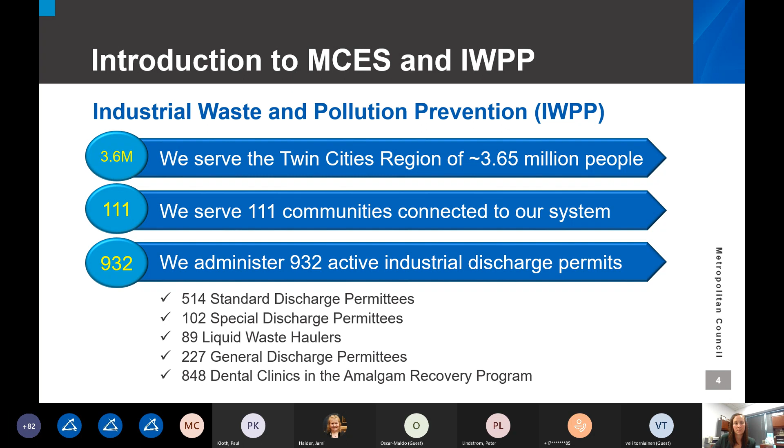Our authority comes from the Clean Water Act of 1972. The act called upon EPA to develop the National Pretreatment Program, as well as pretreatment standards to control industrial discharges into sanitary sewer systems. This program delegates the enforcement of those pretreatment standards down to local programs like MCES. It also allows us to develop our own local limits to protect our plants. We have had an approved pretreatment program since 1982.

In our pretreatment program, we issue permits to our industrial users. Most of you in attendance hold either a standard, a special, or a general discharge permit. There are some differences between them. This table aims to summarize both the commonalities and the differences, most notably in the permit duration, reporting frequency, and sampling requirements.

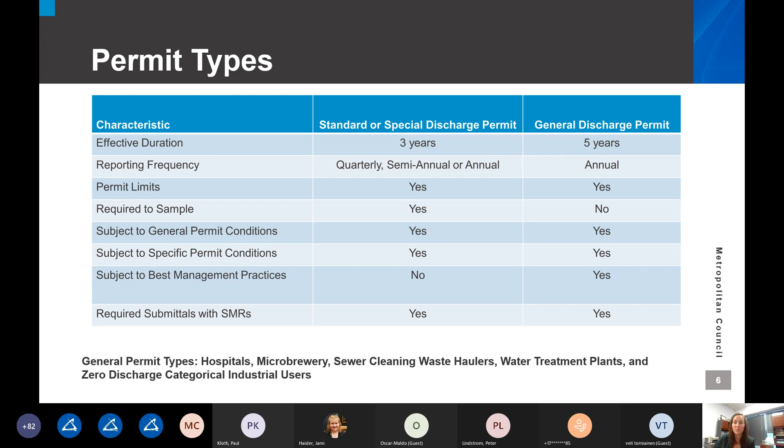Over the past 10 years, we have moved certain industry types to general permits because they have less of an impact on our system, and their discharge can be managed easily by following best management practices. We currently issue general permits for hospitals, microbreweries, sewer cleaning waste haulers, water treatment plants, and categorical industrial users that do not discharge any processed wastewater to us.

One big change this year is that we will be implementing a new low-impact standard discharge permit. This permit is intended to lower the regulatory burden for standard discharge permit holders who are not classified as a significant or categorical industrial user and are not expected to have a significant impact on our collection system and wastewater treatment plants. This new permit type will be effective for 5 years.

The reporting frequency will be annual, and sampling will be required only during the first year of the 5-year permit cycle. If you qualify and your wastewater is strength chargeable, you will be assessed strength charge for the duration of the permit based on that first year of analytical results.

This permit type will carry a lower fee. It will be $825 in 2022. Finally, MCES will continue to inspect and monitor these facilities at least once during the permit cycle.

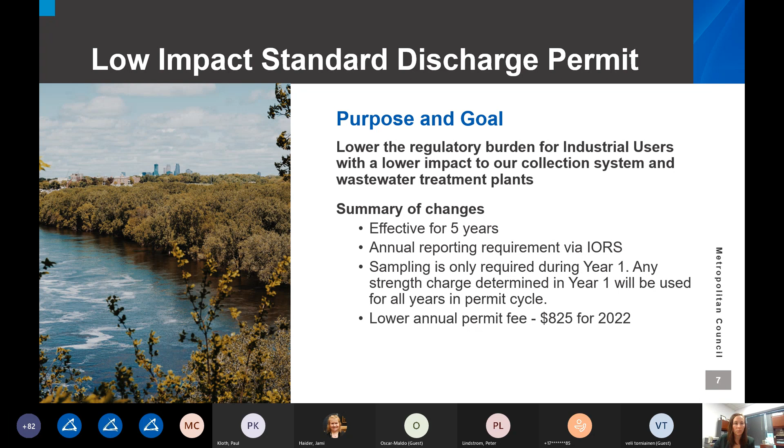There are some eligibility criteria for the new low-impact standard permit. First, the industrial user must not be classified as an SIU or a CIU. The average total facility discharge volume must be less than 25,000 gallons per day, and the average strength charge must be less than $1,000 per year.

The concentrations of all metals must be less than 25% of the corresponding local limit, and pH must not be a concern. The industrial user also cannot rely on a significant pretreatment system prior to discharging to MCES. And finally, an industry must have a strong history of compliance.

So we will be rolling out this new permit type this spring in the next couple months. We are using data from the last 3 years to see who is eligible. So next year, those who are eligible will be notified and will be invoiced a lower annual permit fee.

After that, our permit staff will be working on amending and reissuing those permits. Once they are reissued, your reporting requirements in the online reporting system will be updated.

So those who qualify and are currently on a semi-annual reporting status, you will not be required to submit your January-June 2022 self-monitoring report. And if you already have done your monitoring for the year, you will be able to submit that with your annual report that will be due in January.

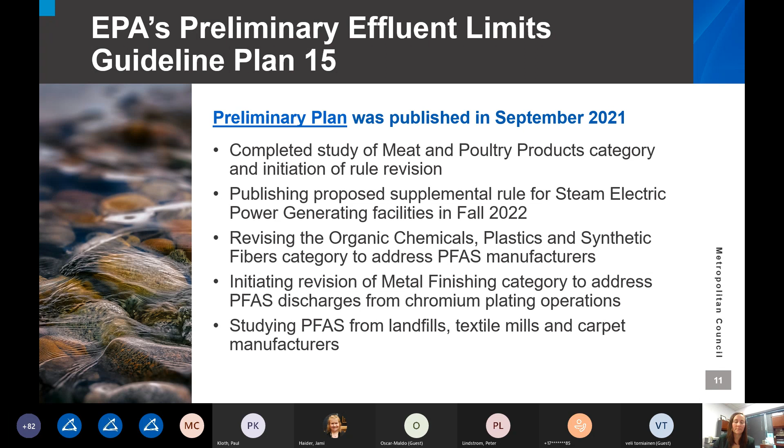This revision will affect some of our industrial users. And lastly, they are beginning to study PFAS from landfills, textile mills, and carpet manufacturers. This is in the study phase, not in initiating a rule or limits phase. So they're just studying at this point.

When we take a look at the state landscape, many of you are likely aware that MPCA issued its PFAS monitoring plan last month. The plan has 3 goals and objectives. The first is to gather data to help craft policies around PFAS and incorporate them into existing programs. They want to identify areas of concern that need quick action.

They're also looking to use data to support source reduction and pollution prevention activities. MCES was notified that 5 of our 9 wastewater treatment plants will be included in the wastewater monitoring plan. Those plants are Rogers, East Bethel, Seneca, Blue Lake, and Hastings. Our largest plant, Metropolitan in St. Paul, will be subject to the air monitoring plan.

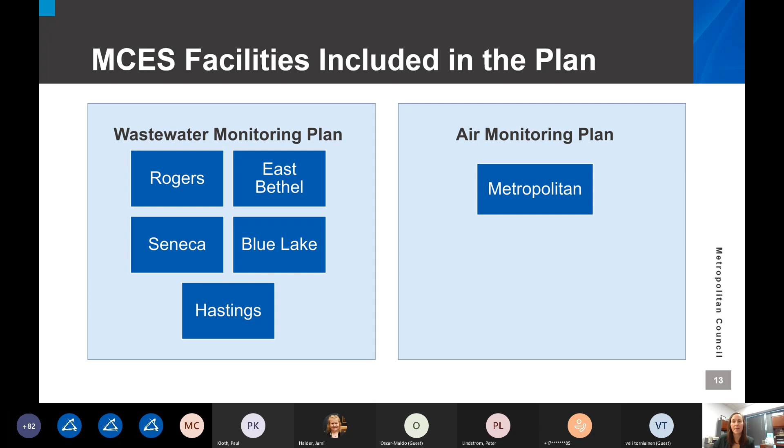Of our 4 remaining plants, which are Metropolitan, Empire, Eagles Point, and St. Croix Valley, they will not be covered by the wastewater monitoring plan. Those 4 plants all discharge effluent into a water body that MPCA has listed or has proposed to list as an impaired body for PFOS. These facilities will go through a permit-based NPDES process to address PFAS.

There was a kickoff meeting yesterday with MPCA and they shared their timeline. Facilities subject to the wastewater monitoring plan will conduct influent sampling in quarters 1 and 2 of 2023. In the following 6 months, facilities will then be conducting source identification and reduction work, hoping to reduce those sources. Then in quarters 1 and 2 of 2024, 2 more samples will be taken to determine the effectiveness of that source reduction work.

MPCA will be using those first 2 quarters of influent sampling data to determine which municipal wastewater treatment plants are in the high, medium, and low priority response threshold groups. Future source reduction activities will then be determined for each group.

It is anticipated that there will be future phases of the monitoring plan that will expand to sampling for PFAS in our effluent and our biosolids. They also plan to develop guidance materials to help municipal wastewater treatment plants look for PFAS sources and reduce them in their influent.

At this time, we are still developing our response to the monitoring plan. There are 91 wastewater treatment plants subject to the plan, so it will be very important that we all use the same methods for sample collection and analysis, as the data will be used by MPCA to develop future phases of the monitoring plan.

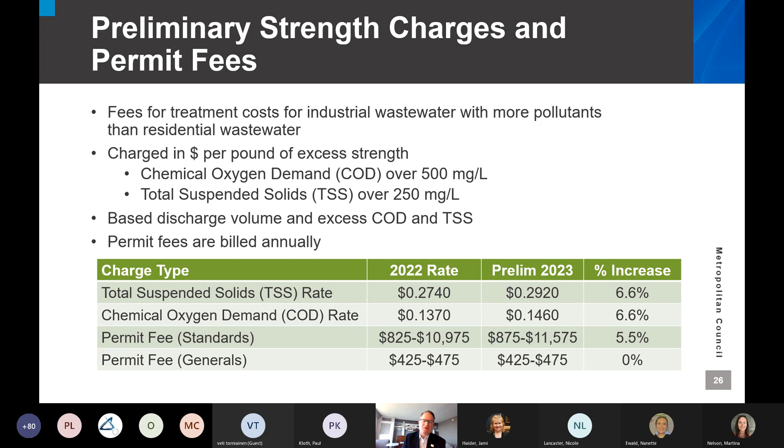And then our permit fee for our generals will stay the same. That's because we've found that the marketing and printing costs to increase it is actually more than the revenue gain that we would have if we raised the price. So we'll keep those there. Service availability charge, that's our connection fee. It pays for the capacity in the system if you either connect first or if you expand your use. We do charge that directly to local governments for initial connections, and then those governments pass it on to the end users, which is you folks.

It's based on the discharge of a typical household, which is 274 gallons a day, or the maximum discharge from a house. And then, of course, a business will go through our SAC determination letter process to determine how many SAC units are due. And we use SAC as a tool. We call it generational equity. If we build a pipe, we build it bigger than we need it, but we put it on financing so that future users will pay for it rather than current users. And that's what's baked into the SAC charge.

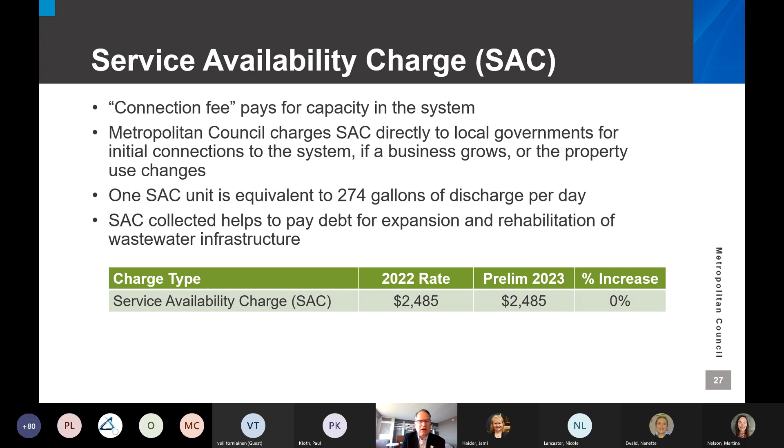We are thrilled to announce, though, that it'll stay flat, $2,485. We haven't raised that since January of 2014. And we've seen great development in the region, and so that is keeping our SAC healthy. An alternative to SAC is the industrial capacity charge. This is a choice you can make when you first get your industrial SAC bill. So we charge for commercial SAC, which is the SAC for the building, and then industrial SAC, which is the SAC for the process discharge.

And you can choose to either buy all your units up front, or you can buy a minimum of 3 and then kind of pay as you go. It's like a rent, and it is not rent to own. It is just rent, much like an apartment. And that's going to go up just a bit. That's driven by a lot of factors, including our expenses, but also the flows that we see. And you can see it's just up 1.8%, and that is $2.25 per 1,000 gallons. So it's based on flow. We use that as a proxy for the capacity that's demanded. And that is all I have. And so with that, I will be happy to answer any questions.

Great, thanks, Ned. So I'm going to pause and look for some hands, see if I see any questions in the chat. Ned, I did get a question. What were the impacts of COVID on MCES finances the past 2 years? There are 2 answers. The short answer is none. But the longer answer is a little bit. Well, let's even back up. So in 2020, we built our 2021 budget in March of 2020. So that's when everything started, all of the shutdowns. And there were dire predictions that cities would go bankrupt because commerce would shut down. And so we wanted to be sensitive to that.

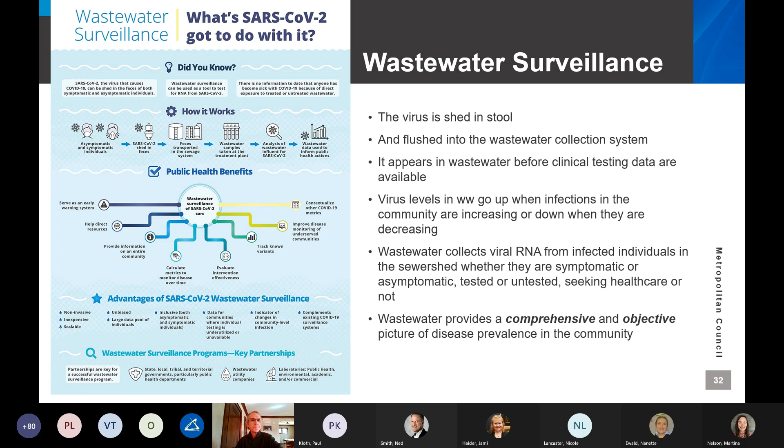So what we're doing is at the Metro plant, we collect a daily 24-hour composite sample of our influent. We homogenize that sample. We treat the wastewater with a little bit of what's called Zymo DNA/RNA Shield. It's a stabilization and lysis buffer that basically breaks up the virus particles that may be in the wastewater, and it stabilizes the RNA that we're looking for. Mix that well and incubate it for about 90 minutes, and then we extract the viral RNA from that sample.

To do that, we use what's called a Zymo III-P column, and we run the sample along with some 100% ethanol through the III-P column. This is a silica column, so when the RNA in our sample gets into the column, it attaches to the silica in the column, and it sticks basically and stays there, and the rest of the junk flows through. And then we wash the residual junk off the column, and we elute the RNA in 200 microliters of elution buffer.

And then we take that 200 microliters and we run that through a second, smaller column, which is also a silica column, and basically do the same thing again, but it's a smaller column, so we can elute it with a smaller volume of water, just 20 microliters in this case. So what we've done is we've basically gone from our original sample, which was 3 milliliters of wastewater, down to having all of the viral RNA in just a tiny little teardrop sample of 20 microliters of pure water.

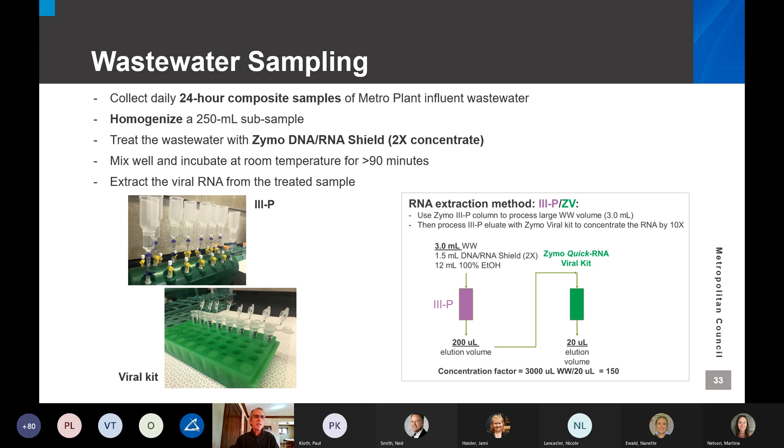And what we do with that is we take it over to the University of Minnesota Genomics Center, and they do something called droplet digital PCR. And what that is, we're looking for specific fragments of the viral RNA that is in our sample. And these fragments that we're looking for, in this case, we look for the N1 and the N2 fragments on the nucleocapsid gene. And so that will give us basically the total amount of viral RNA in our sample.

And then we're also running targeted mutation assays looking for the K417N, L452R, and the HV69/70 deletion or mutations, and those tell us what variants are actually in our sample. So we can distinguish between the different variants of concern that are circulating in the community by looking at the wastewater and measuring these specific mutations.

And then we get the data back from the Genomics Center within 48 hours, and we report it to the Department of Health the next day, basically. And we also report it to the governor's office. And we sit on a bi-weekly meeting with the Minnesota Department of Health. They have an early warning system team where we talk about our data and try to help them determine if there's going to be an increase coming or what the variants are doing in terms of changes.

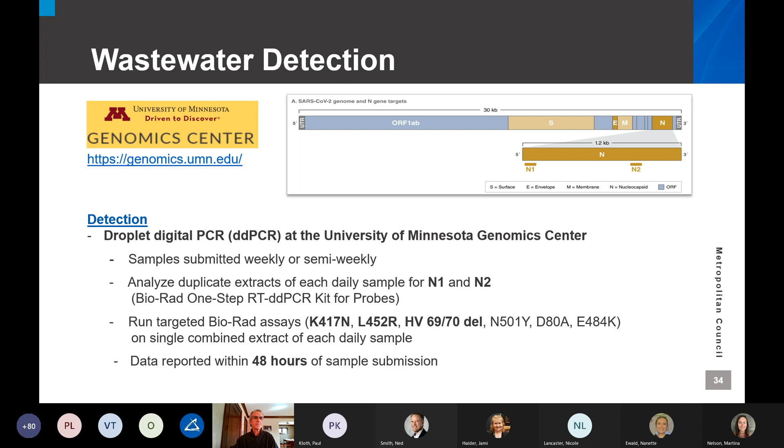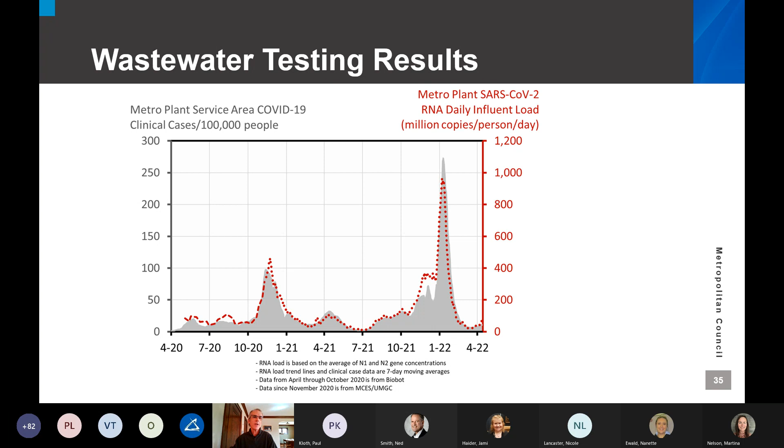And so I encourage you to have a look at our dashboard. Again, it's updated every week on a Friday around noon, and you can see what's going on in your community right there.

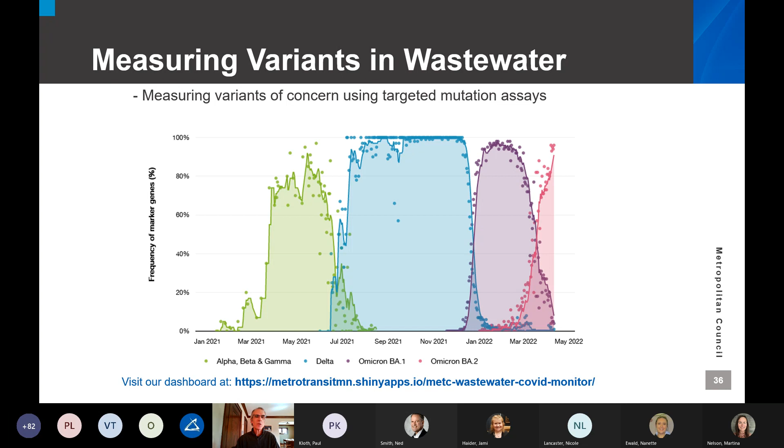So in summary, we can accurately measure the SARS-CoV-2 RNA concentrations in the wastewater entering our treatment plants. The RNA concentrations and loads track very well with the clinical COVID-19 case counts reported by the Department of Health over time. This data is useful to the public health authorities, and they're especially interested in the variant information, and it's really good now that there isn't as much clinical testing going on, because they're kind of flying blind in terms of having enough data to make decisions. So the wastewater signal is really important for understanding what's happening when case numbers are low.

And we can monitor the variants of the virus that are circulating in the community and hopefully provide early warning of their presence and prevalence to the decision makers at the Department of Health and in the governor's office.

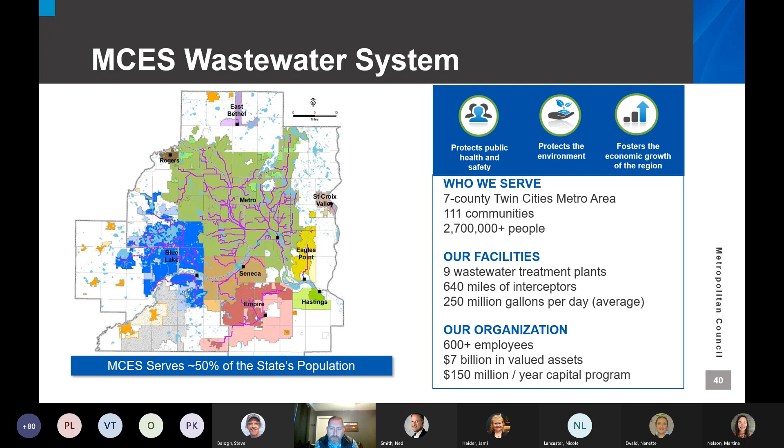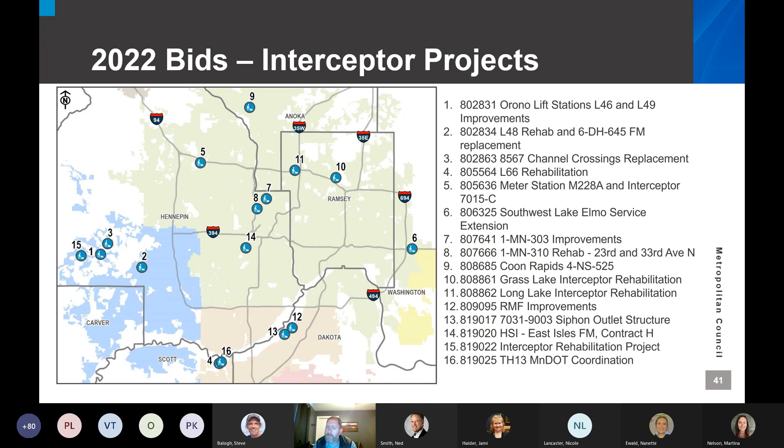The 9 plants combined treat approximately 250 million gallons of wastewater each day. 8 of the 9 treatment plants discharge their resulting clean water to the Mississippi River or St. Croix River, and the East Bethel facility disposes of its highly treated discharge through rapid infiltration basins, which augment the shallow groundwater table.

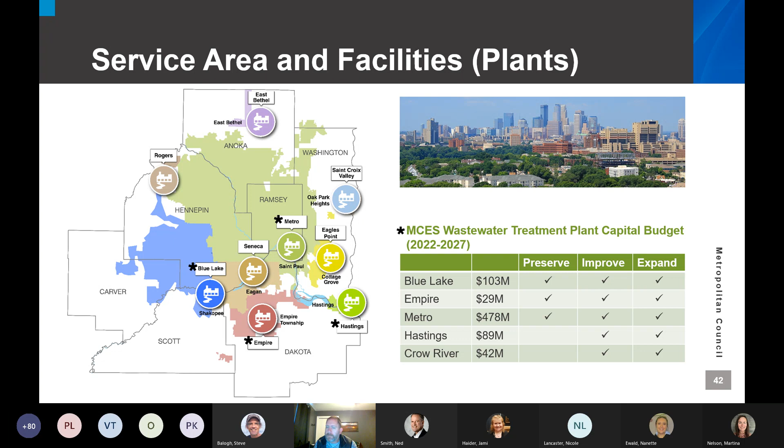When we develop our capital program, finance and wastewater planning and capital project delivery teams work together to balance our identified needs with the impact to our rates. We look at our history of spending, inflation, and the timing of our large projects. Our goal typically is to spend between 80 to 85% of our planned program, which gives us some flexibility if a project's priority changes due to needs from one of the infrastructure partners, or if a project slips a bit on schedule.

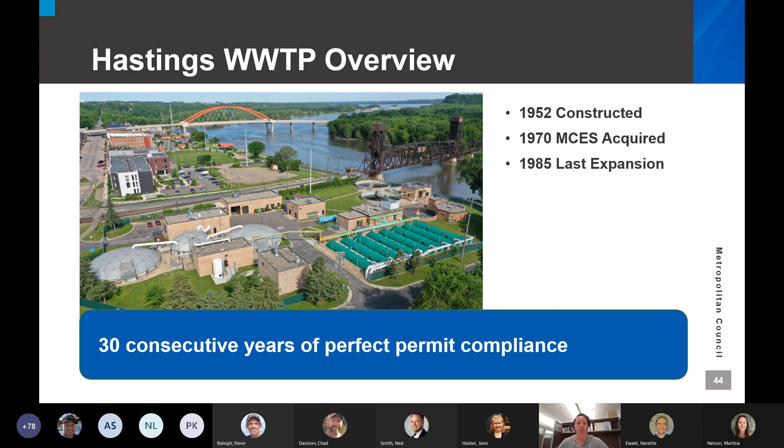Relocation of the Hastings wastewater treatment plant is really driven by 3 main elements. The first element is growth. The Hastings treatment plant is projected to exceed its existing capacity of 2.34 MGD in 2050 due to growth that's occurring within the service area.

The second element is the ability to meet future potential regulatory requirements. In addition to capacity needed for growth, additional treatment capacity would be required to meet future environmental regulations for total nitrogen, which we anticipate to see come to us within this planning period.

The third element is really the need to make significant investments in the existing facility. That condition assessment that I mentioned indicates that we have a need for significant investment in a site that can no longer meet the needs of our long-term service area.

So in lieu of continuing investment in that site, what we will do is relocate the facility and perform a very modest renewal project at the existing site in order to continue reliable service through commissioning of our new plant. So just enough work to get us through the construction and relocation of our facility.

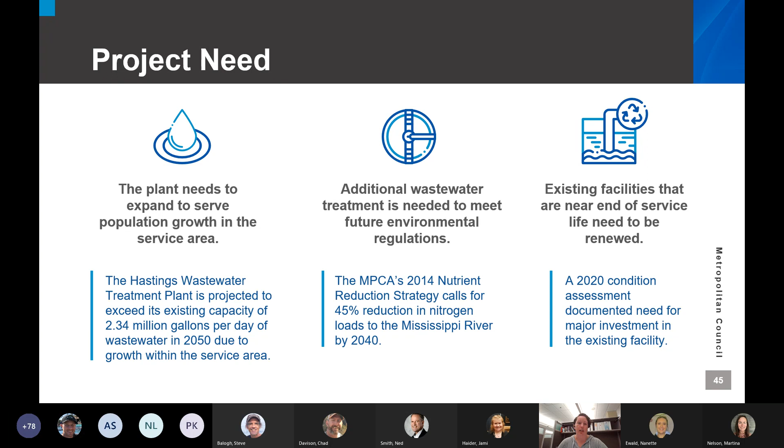The new wastewater treatment plant will be relocated about 2 miles southeast of the existing plant site onto 221 acres of MCES owned property located in Hastings and Ravenna Township. The overall program cost for relocation of the plant is $165 million. There are 3 main work areas required to relocate the facility.

First is a new lift station, force main, and gravity sewer needed to transport wastewater to the new plant site. That work is slated to be delivered via design bid build, occurring 2024 through 2026. That work would then commission just prior to startup of the new wastewater treatment plant. The estimated cost of that portion of the work is $23 million.

The second element is a new wastewater treatment plant and an outfall to the Mississippi River. That work will be delivered via the design build process, anticipated to occur 2024 through 2026. The design build process requires the design builder to certify plant process performance, keeping responsibility for performance with them until the council accepts it. So we would expect at least 1 year of commissioning and process proving by that design build team to begin in 2027. The estimated cost of that work is about $139 million.

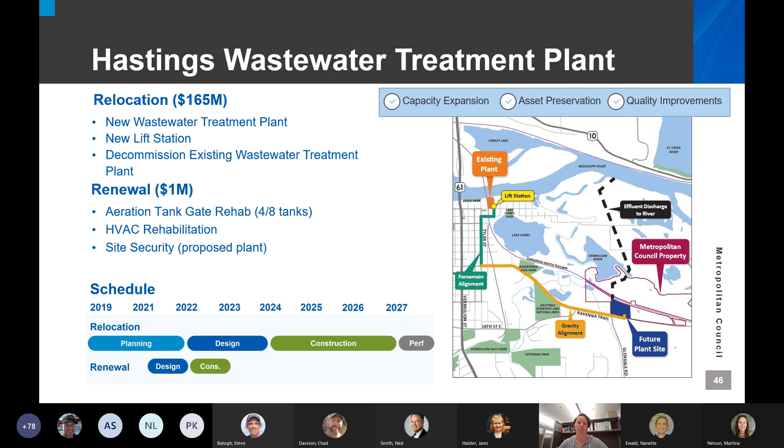There is a modest renewal project underway at the current treatment plant, just to maintain reliable operations until the new plant is commissioned. That work includes rehabilitation of some aeration tanks, mechanical HVAC work, and site security improvements, anticipated to start this summer.

The facility would be located in the city of Hastings with no treatment plant infrastructure constructed in Ravenna Township. This area is able to support a 10 MGD facility. It minimizes disruption to the natural landscape and is the most efficient and effective use of the site. Further elevating our treatment structures will allow us to protect our infrastructure from the 500-year flood, and it also allows the treated effluent to flow by gravity to the Mississippi River.

Wastewater will be treated using a variety of physical and biological treatment processes. Effluent will be disinfected by a UV system prior to discharge to the Mississippi. A life cycle cost analysis determined that continued transport of solids to the Metropolitan Wastewater Treatment Plant for incineration is our most cost-effective solids management alternative. A 2-lane drive-through loadout facility would be provided to support increased efficiency of this practice.

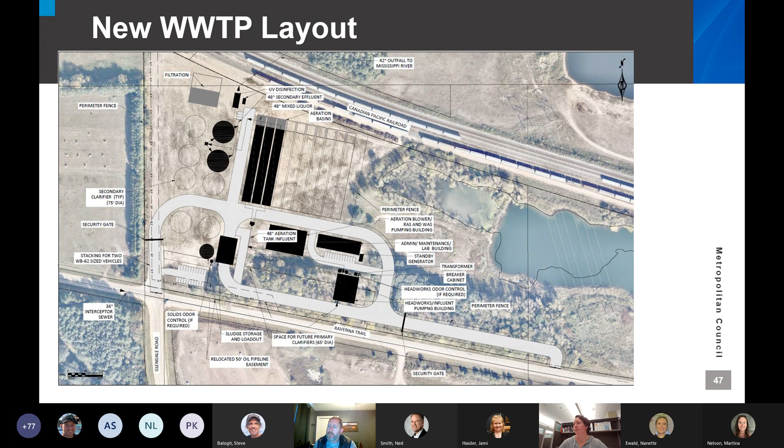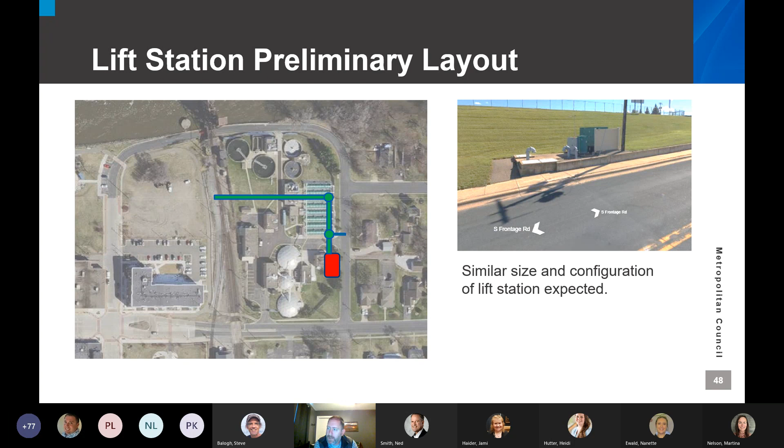The existing system in Hastings has a large trunk pipe that comes down, basically following the railroad tracks on the east side of town, just east of Tyler Street. As it crosses 10th Street, that sewer is at an elevation where we can divert 90% of the total Hastings wastewater system flow straight to the new treatment plant by gravity sewer.

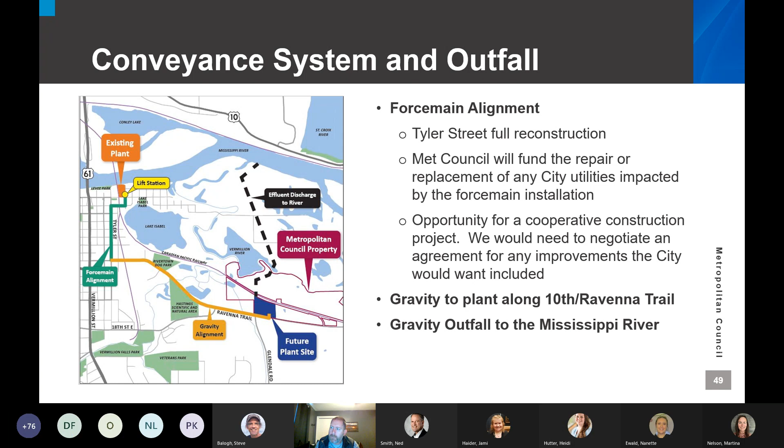Met Council took ownership of the existing plant in 1970. We entered into an agreement with the city at the time that stated if the property ever ceased being a wastewater treatment plant, the land would be reverted back to the city. So we have to have some sort of agreement to facilitate handing that property back over to them so they know exactly what they're getting.

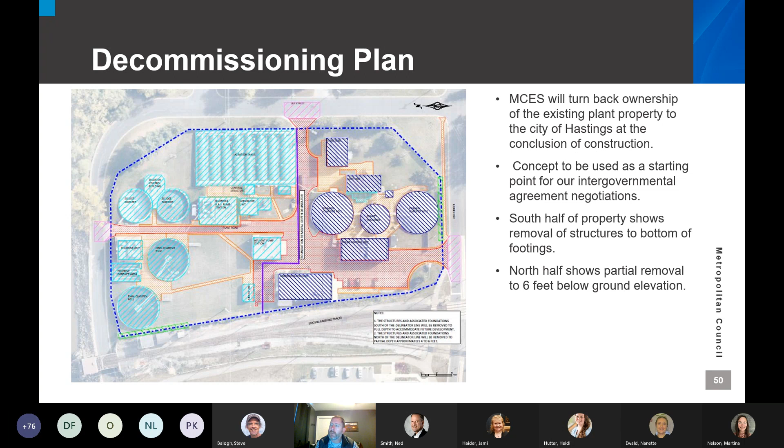That concludes our presentation for Hastings. We welcome any questions.

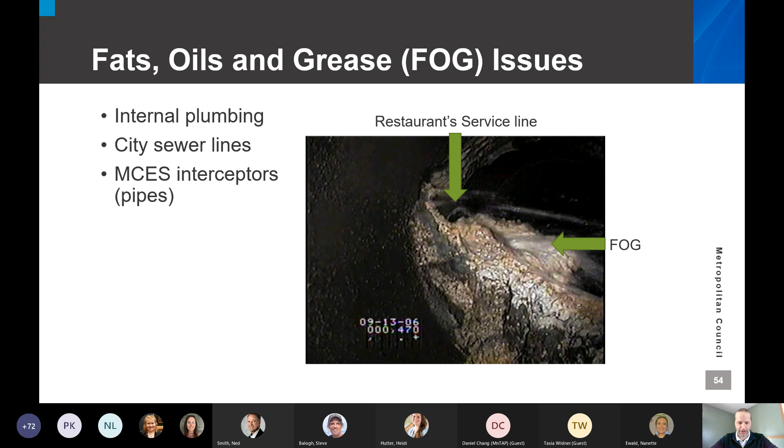FOG that reaches the primary treatment plants or tanks of our smaller plants will float on the surface and needs to be skimmed off, then hauled to our largest treatment plant, the Metro plant in St. Paul. All of this FOG removal creates labor, disposal, and transportation costs.

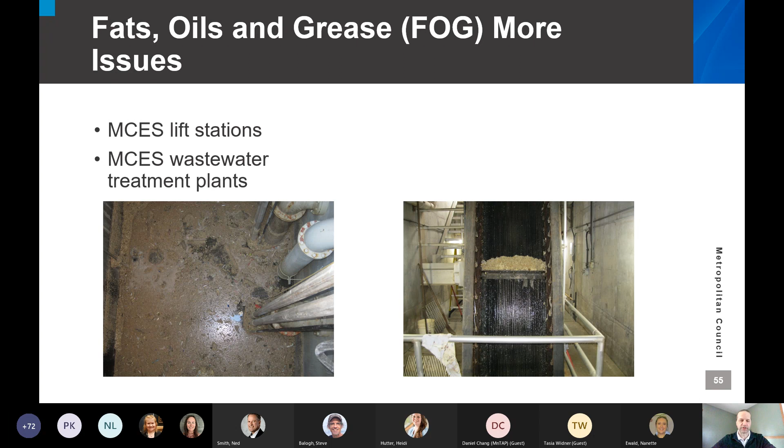So what can be done about this problem? If your facility has a grease trap or interceptor, it needs to be maintained properly. The frequency of maintenance will depend obviously on the nature of your flow and the size of the interceptor, but certainly often enough to ensure the efficient operation of that interceptor.

Source control is also important. This will vary by facility and may require some creativity and employee training, but any steps that can be taken to keep grease out of the drains to begin with, for example, placing grease-laden waste in either trash or recycling receptacles instead of just blasting it with scalding hot water and sending it down the drain will help us a lot.

Lest anyone feel left out of this discussion, even individuals can do their part in the home to keep grease out of the sewer. This can be done by placing greasy food waste in the garbage and never pouring any type of liquid grease down the drain.

I thank you for your time, and I will now turn it over to Isaac Razor, who will talk about the problem of rags in the sewer.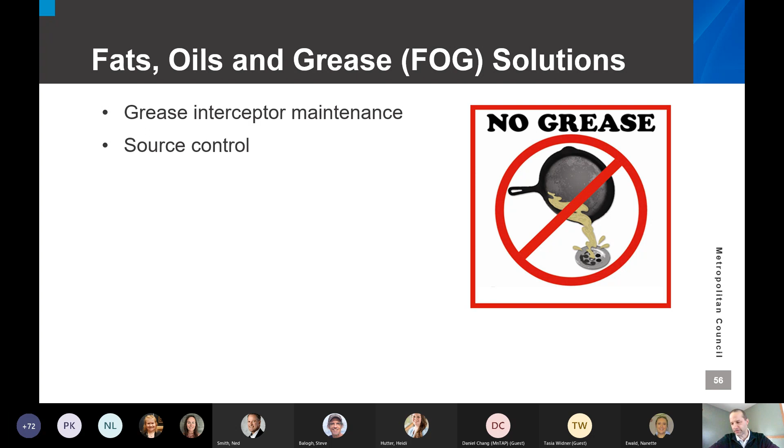Hello, everyone. My name's Isaac Raser. I'm an assistant manager in interceptor operations at the MCES. The interceptor department is the department that operates and maintains our collection system.

Before I get started, hoping everyone can kind of see the blinds in my office behind me. The sun is shining today. I had to close my blinds before this presentation, so please get outside and enjoy some sunshine. We have not seen much of it lately. All right, back to business.

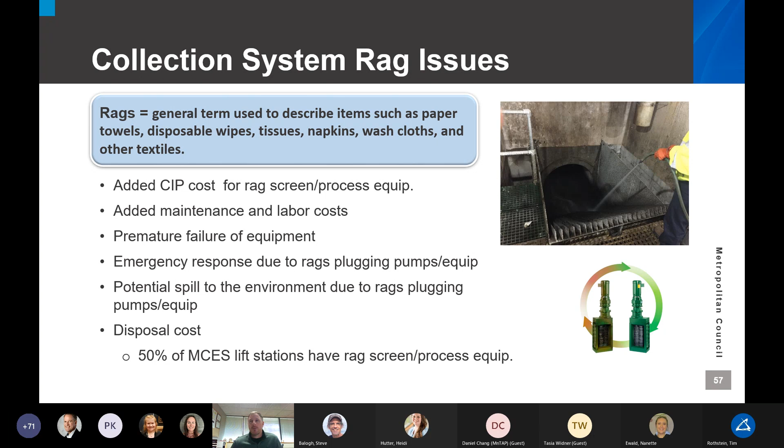I tried to move to the next slide and I don't know if it went. Still seeing your first slide. How about now? Now I see it.

All right, thank you. Just a couple examples to share with everyone about some issues that we find in the collection system. These photographs are not pulled from the internet. These are from actual MCES crews dealing with rags in our collection system. I have a whole folder full of them. I tried to pick out a few good ones here.

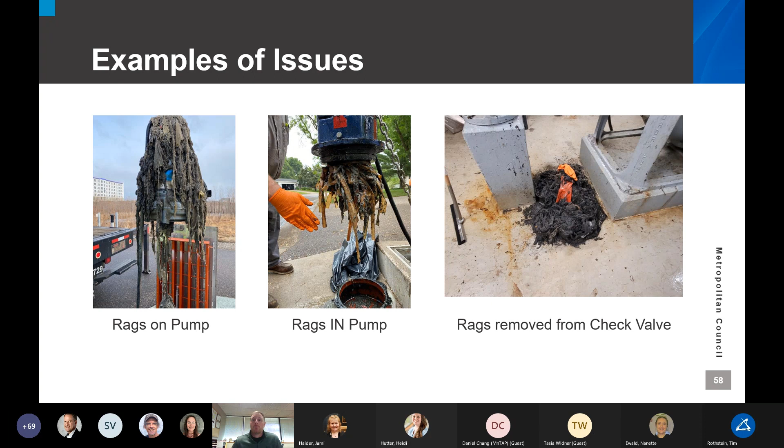We have worked with our communications department on coming up with some ways to do that. A lot of times we'll send out flyers, mail things out, or just stop in and have conversations with businesses. With that, I think that is my last slide.

Great. Hello, everyone. I'm Brian Davis, and I work in water supply planning here at the Metropolitan Council. I'm going to be talking with you today about the regional benefits of our water efficiency grants and the legacy amendment funds that we receive.

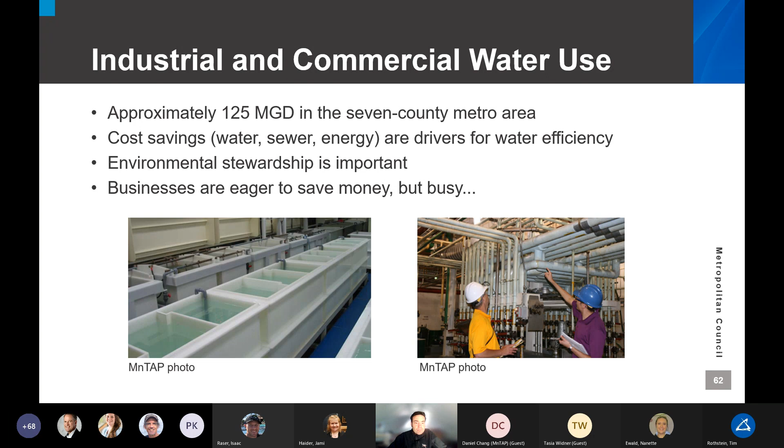They don't have enough staff or enough staff time to focus on some of these projects where the water savings can be realized, which is understandable. So to address that, MCES has been working with the Minnesota Technical Assistance Program, or MnTAP. MnTAP was created in 1984, and we have been in partnership with MnTAP since 2012. So we're at a decade of partnership with this program.

I'll give you just a quick overview of MnTAP. There's going to be a more detailed presentation about that coming next. But it's an organization that's run through the University of Minnesota that focuses on water and energy and waste reduction and efficiency. Of course, our focus here in this program has been under the water efficiency category.

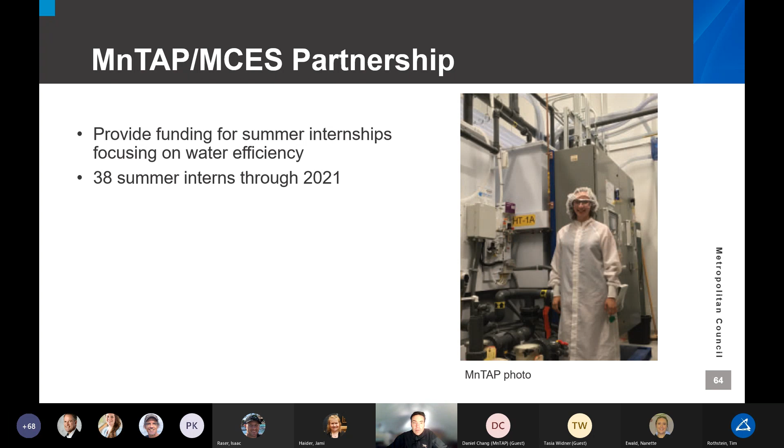And as part of those efforts, we have been providing funding for summer internships for college students in engineering and science to work for a summer at a metro area business on a project that is focused on water efficiency. And we have had 38 of those summer interns that we have helped fund through last summer. So quite a number of them.

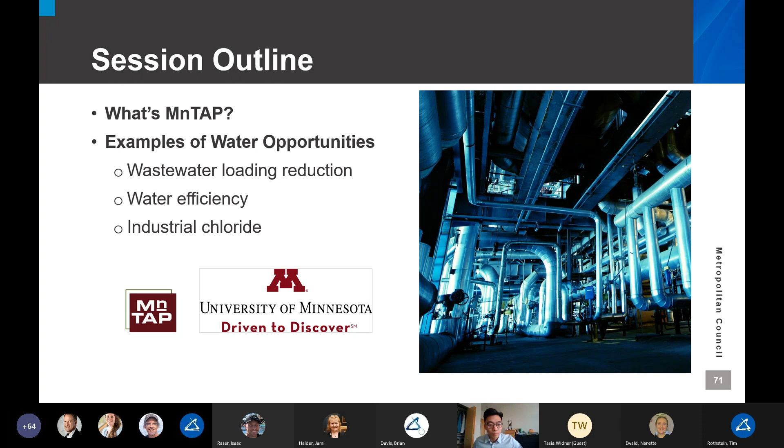We are the Minnesota Technical Assistance Program, established in 1984 at the University of Minnesota in the School of Public Health. We're an outreach and assistance unit for industrial businesses that provides pollution prevention and technical assistance, at no cost to our clients, because we are grant and partner funded. We are confidential and non-regulatory, so businesses can feel confident and assured the information they share with us won't be released to third parties. We provide assistance in a variety of ways, primarily through site assessments, interns, and teams.

Additionally, we have a variety of research, case studies, and other resources on our website that we can link people to when we get incoming phone calls or inquiries. We also handle some questions on waste management best practices or even regulatory concerns or issues, which come in from time to time.

We also run the Minnesota Materials Exchange Program, which is a little like a Craigslist for businesses, where you can list or view listings for different materials you're seeking to get rid of. Everything from paint to pallets—if you have it in excess or are looking to get rid of it, this might be an option so you don't have to pay for disposal, and something that would otherwise go to waste can be reused instead, which is a nice thing.

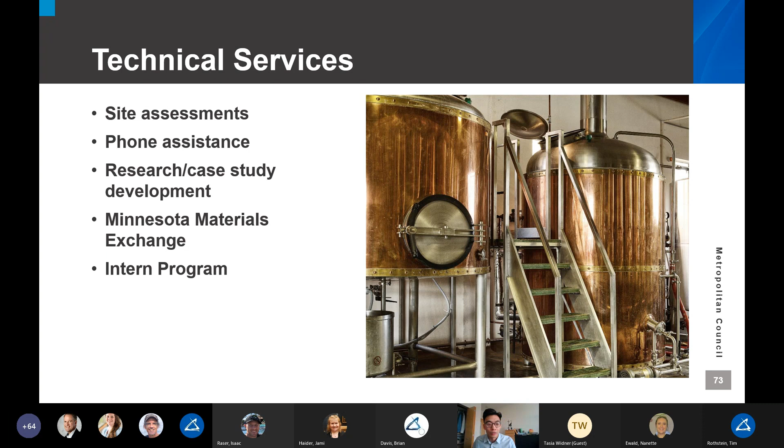More on site visits. This is an opportunity for us to sit down with you one-on-one, but we do emphasize being able to go out in person to a facility and be with you, see the floor, see the operations, and understand what's happening, and ask a lot of really basic and sometimes seemingly obvious questions about what's going on. We bring a fresh set of eyes to your facility and try to understand what some of the opportunities are for reducing or conserving water, energy, materials, raw materials, other resources, or conserving or reducing the output of different wastes.

And so we try to drive towards facility-specific solutions that are feasible and provide you with the economic and environmental justification for making changes.

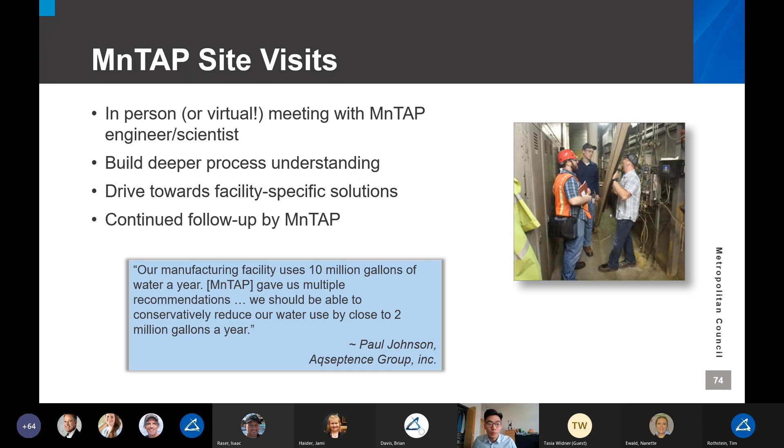Our intern program is similar to that type of structure where we try to work with you in developing those specific solutions. But we also provide a student that is with you full time, and that's a really nice way to have more fully developed and thoroughly researched recommendations. Being on site full time means they have the time to dive deeply into the process and come up with a very solid and thorough understanding of how it works, and provide you with those recommendations, or even bring unique ideas you might not have had time to consider. So if you have different priorities keeping you from chasing down some of these seemingly easy wins, an intern is a great option for businesses that feel like they have room to improve but don't necessarily have the time or bandwidth to make good on those opportunities.

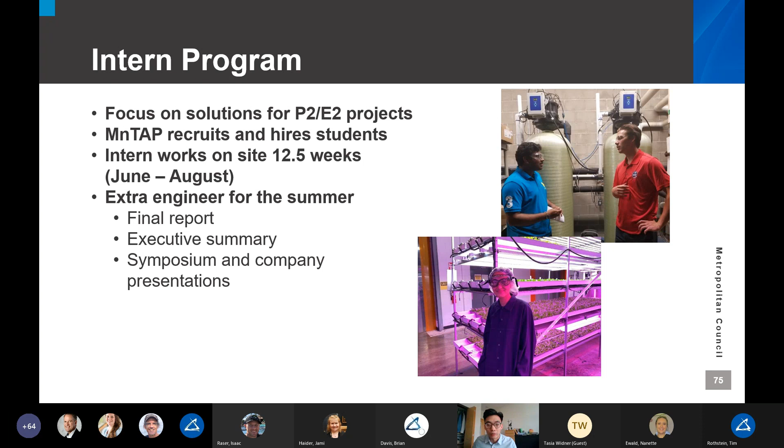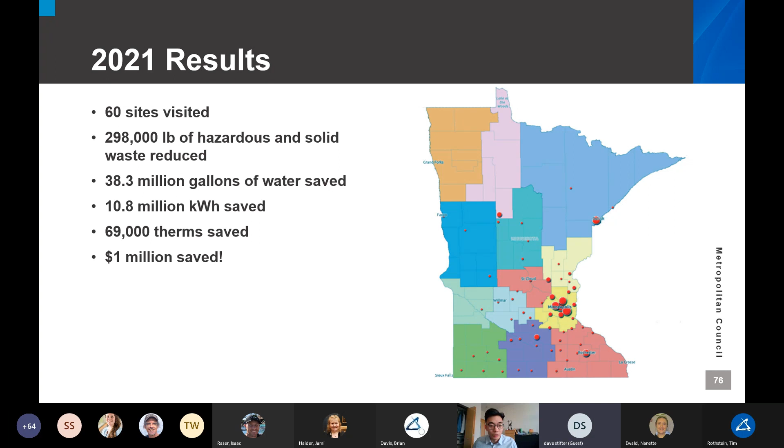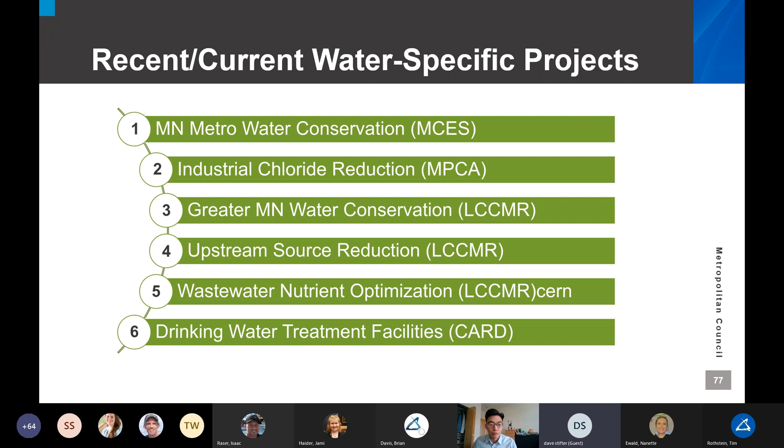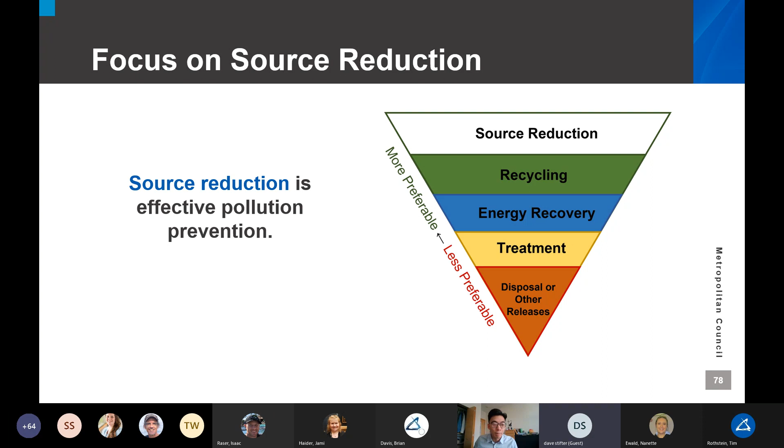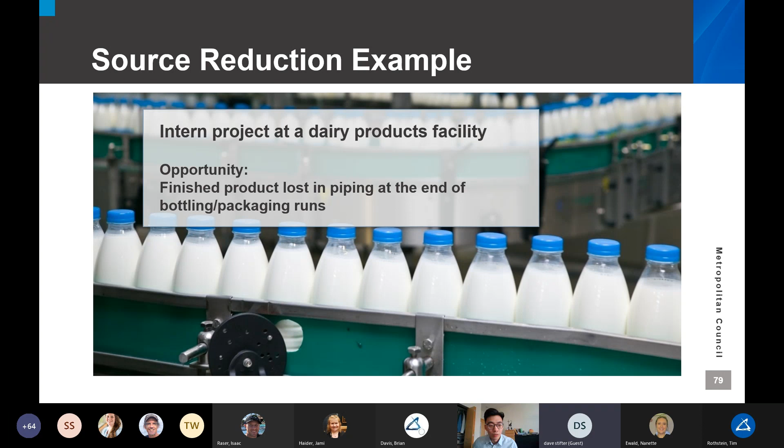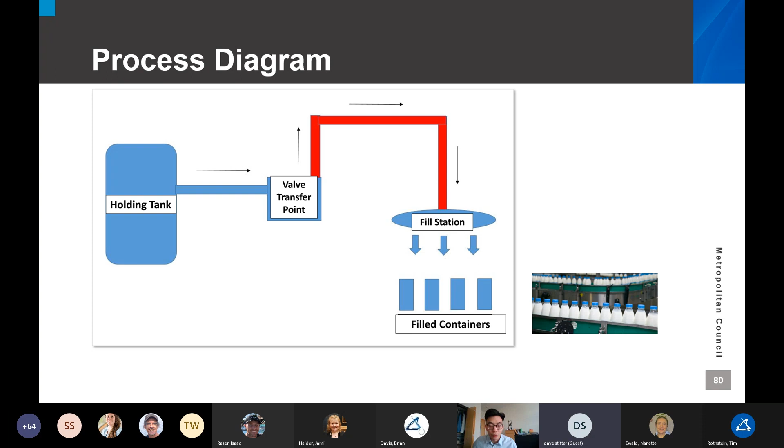An example of that: an intern at a dairy products facility we had a number of years ago. At this facility, there was finished product being lost at the end of bottling and packaging runs. You can see from this diagram that finished product was kept in a holding tank, then moved to a valve transfer point, and onward to a fill station, where it was filling their containers. But at the end of each run, there was a considerable amount of product left in the space highlighted in red, that could not be recaptured and was essentially just being lost to the drain and going to the wastewater facility.

The intern recommended that they use compressed air to push leftover product in those fill lines back to the holding tanks. From doing this, there was actually a considerable amount - 416,000 pounds of product being saved, equivalent to $100,000 in product value. This was on top of additional benefits from the reduced strength charges they were able to see.

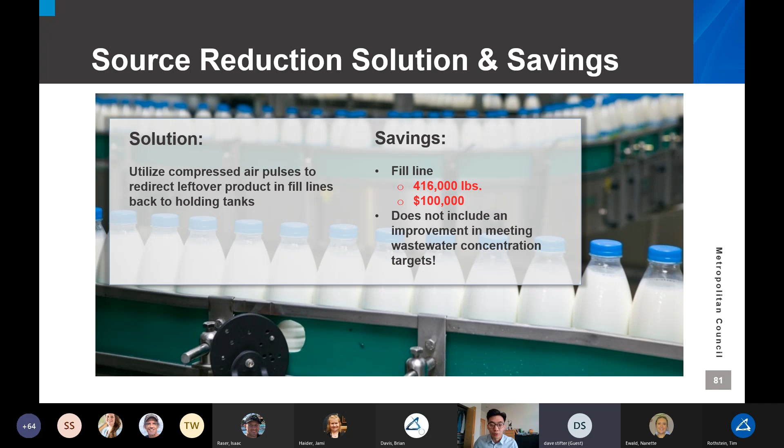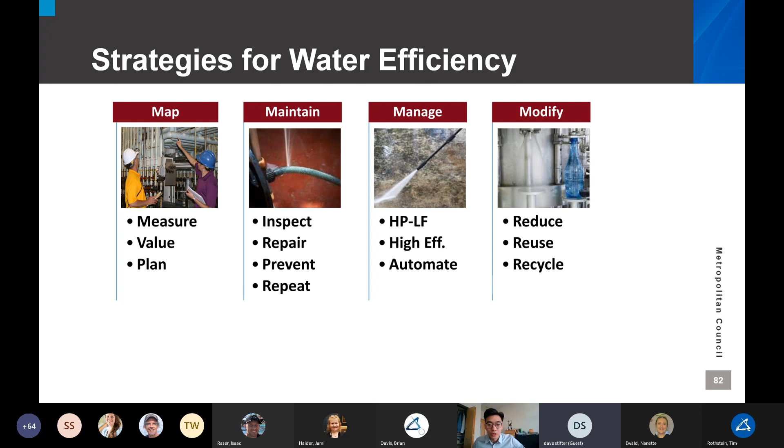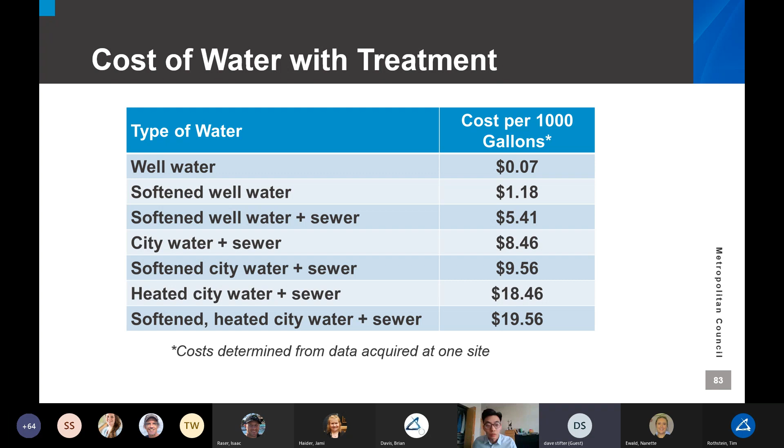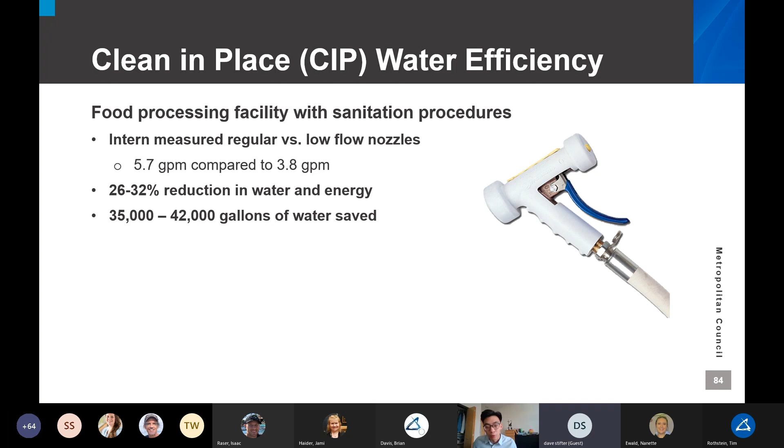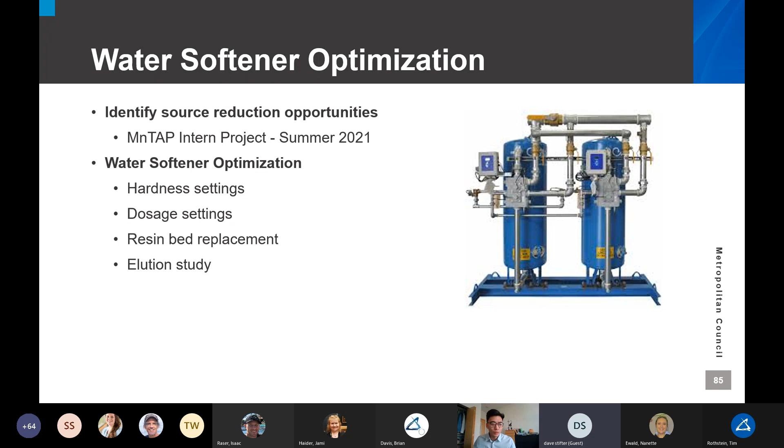When it comes to water softening, it's very important to understand how the water softener's control panel settings are set up, and that's where the salt dosage and hardness settings come into play. Ensuring an accurate hardness setting means verifying that the incoming water being treated is at the actual hardness being set on the control panel. If that setting is too high, the capacity of the softener is reduced and it's wasting salt, essentially it's going to start regenerating earlier than it needs to, so you're outputting more chloride from the brine used to regenerate it. If the setting's too low, you'd risk outputting hard water since the regeneration cycle isn't kicking on early enough, and it's not getting adequate treatment. So the recommendation is to sample the incoming water you have and make sure its hardness matches what's being set on the water softener.

Lowering the salt dosage essentially means lowering the amount of brine used per regeneration, and you can clearly see that would save some amount of salt and water as well. There's some more finesse to that recommendation, but it's a very simple change to make once you know what the optimal amount of brine is.

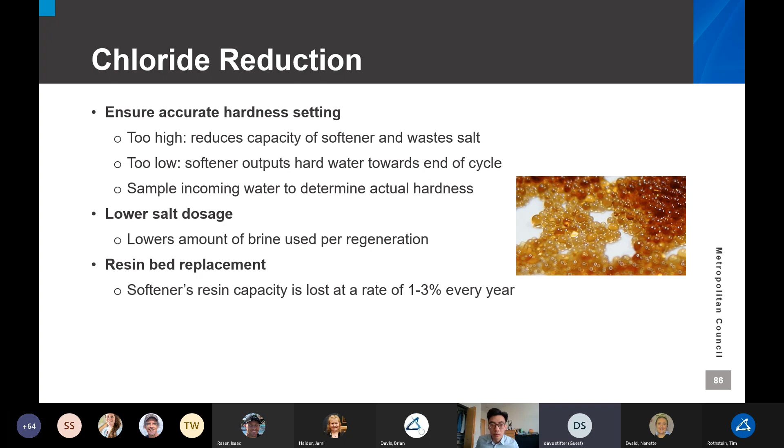And again, like any piece of equipment, resin ages, and so it has a lifetime. This might mean that if you have an older water softener, it might be worthwhile to check in with your water softener servicer to run some diagnostics, conduct an elution study, see how its performance is, and basically make the determination if you should be replacing it, or if it can be cleaned out or otherwise rejuvenated.